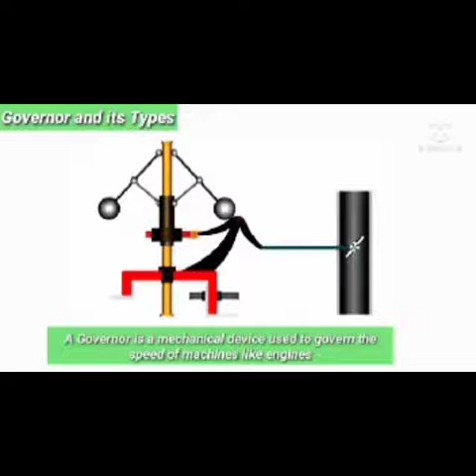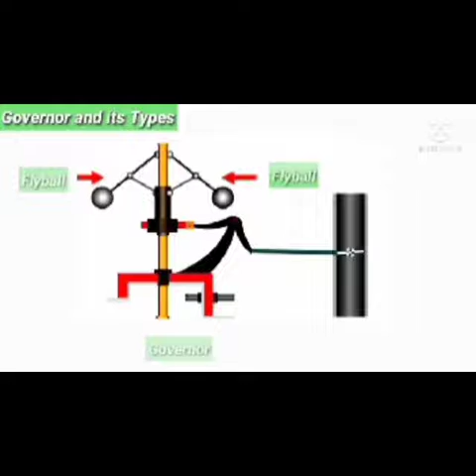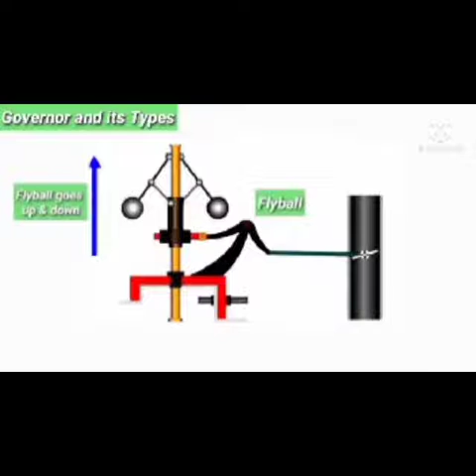It consists of two fly balls which are located at the end of the arms. The upper part of these two arms are pivoted to the spindle. This spindle is driven by the engine through bevel gears. The lower part of the arm are connected to the sleeves, which move upwards and downwards. As the balls move upwards and downwards, the sleeve has stoppers which are provided at the up and down of the sleeves to limit this movement. The sleeve is connected to the throttle valve through a bell crank lever. The movement of these sleeves controls the opening and closing of the throttle valve.

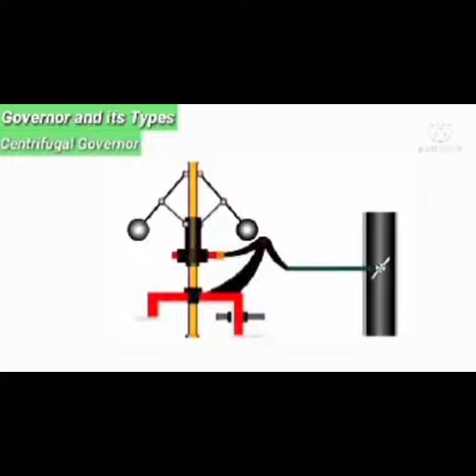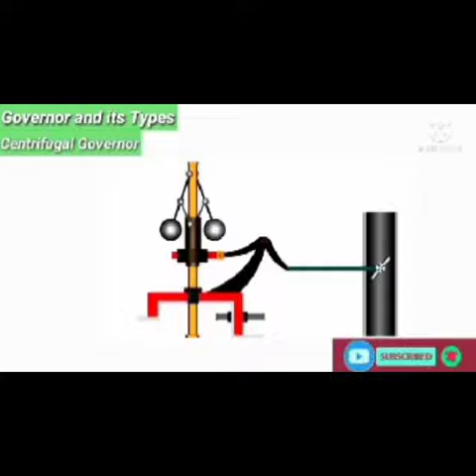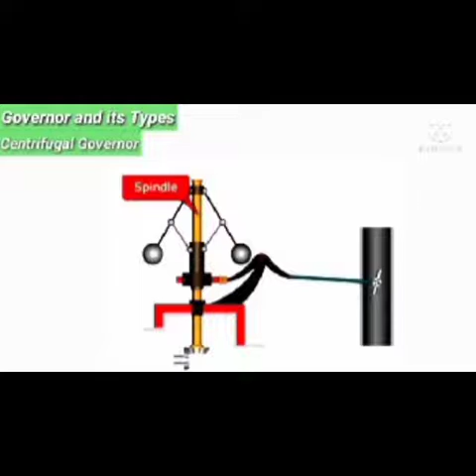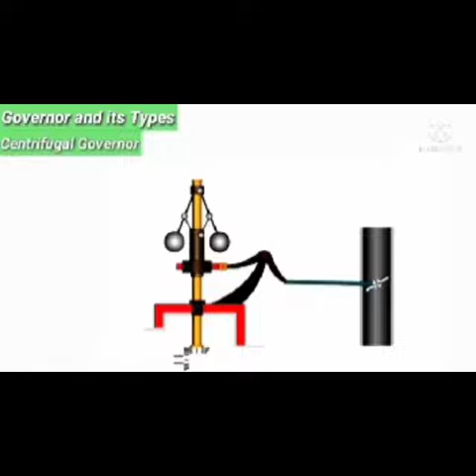Now let us talk about the working of the centrifugal governor. The engine drives the spindle of the governor through bevel gears. When the load on the engine increases, its speed and also the governor's speed decreases. The centrifugal force on the balls decreases and the balls move inwards. As these balls move inwards, the sleeve moves downwards, which causes the throttle valve at the other end of the bell crank lever to increase the supply of working fluid, and thus the engine speed is increased. In this case, the extra power output is provided to balance the increased load.

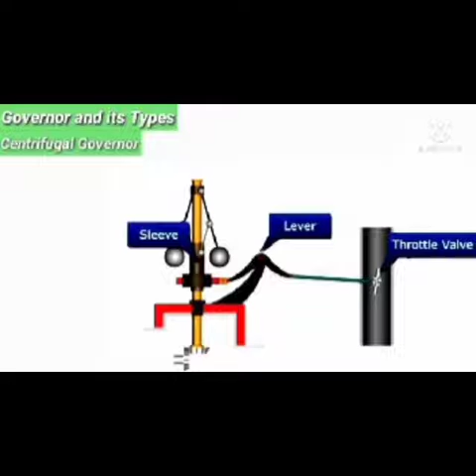When the load on the engine decreases, the engine and the governor speed increases, which results in an increase of centrifugal force on the balls. Thus the balls move outwards and the sleeve rises upwards. This upward movement of the sleeve reduces the supply of working fluid and hence the speed is decreased. In this case, the power output is reduced. So this was all about the working of a centrifugal governor.

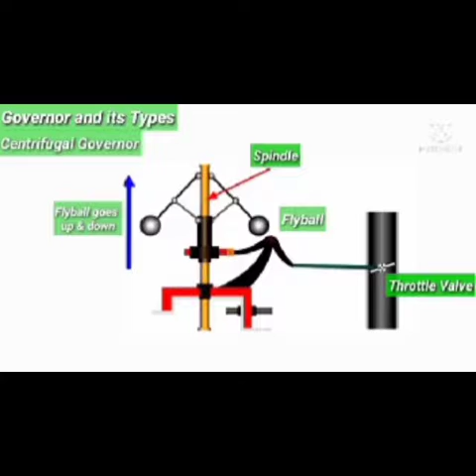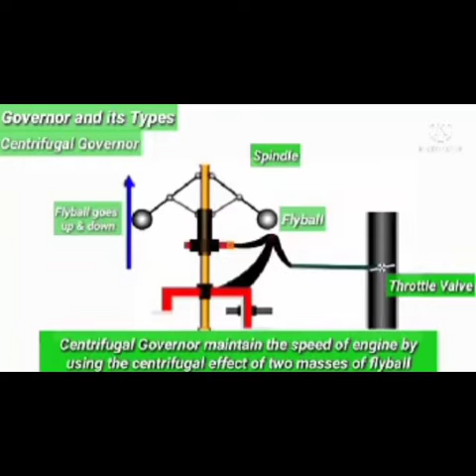The governor is mainly classified into two types. The first one is centrifugal governor and the second one is inertia governor. The centrifugal governor is further classified such as simple Watt governor, Porter governor, Proell governor, Hartnell governor, Wilson Hartnell governor, and the Pickering governor. For the further applications, I would like to hand over to Soham.